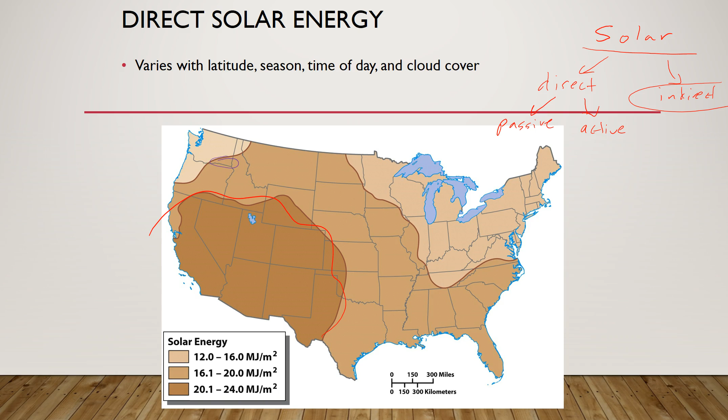Now looking at a map of the U.S., we can see that the potential to use solar energy varies based on location. Here, of course, in the desert Southwest, we've got our largest solar potential - no big surprise there. Parts of Washington, right down where Walla Walla and Tri-Cities are, we've actually got some decent, moderate solar potential in this area. In other areas you could still use solar energy, but probably not get as much bang for your buck.

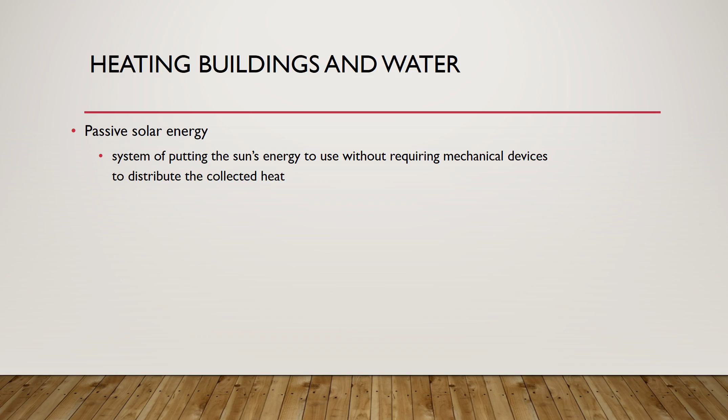When we talk about using solar energy for heating buildings and water, typically these are design features built in, and not necessarily high tech. It could be something as simple as the orientation of your house relative to the direction sunlight comes from, and so on. Passive solar energy refers to the system of putting the sun's energy to use without requiring mechanical devices to distribute the collected heat.

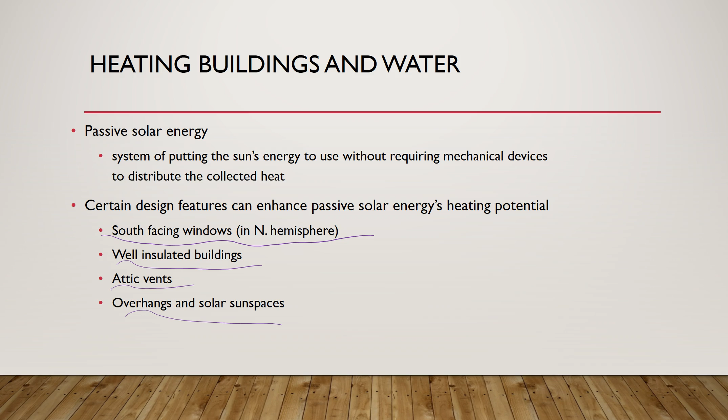So like I mentioned before, south-facing windows, using well-insulated buildings, attic vents, and overhangs and solar sun spaces. These are all design features, low tech, things that we could have been doing for probably centuries now, because they're such low technology.

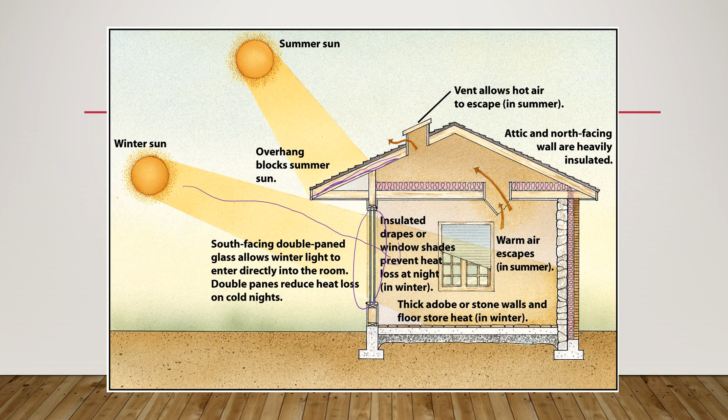Ideally, the south-facing windows would have overhangs that actually shade them during the summertime, so that we're not getting that direct sun during the time of year where we don't want that passive heat. But the overhangs can't be so large that they block that winter sun, in that we can actually use that lower horizon sunshine to directly heat your house, or at least supplement some of the heat you're getting. Now, in order for this system to work, though, we have to have very, very good insulation and so on. But this is an example of how a passive solar house would be built.

Typically, because we're not always going to get good direct sunlight, we might not be able to heat your water enough, so most solar hot water heater tanks have a backup heater. Maybe you only need to raise the temperature a few degrees to get it to the level you want, but it requires less energy from your own hot water heater if you can heat it somewhat with the sun using a solar hot water heater. In the summertime, when you do get that direct sun, your backup heater probably doesn't have to do any work at all. These aren't particularly expensive, but it is considered active solar energy because we have to use some sort of mechanical device.

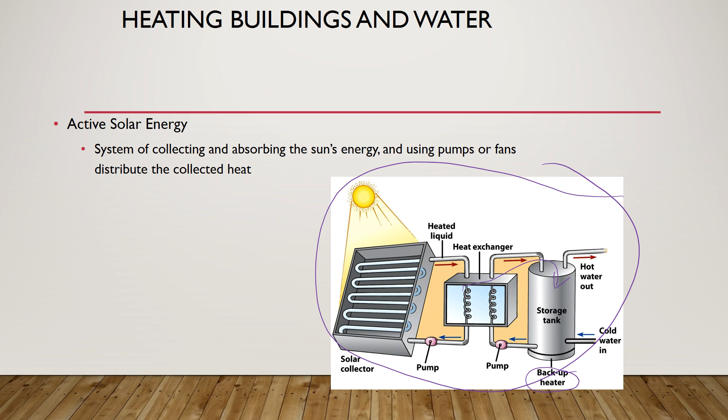As far as electricity generation goes, it's usually done one of two ways using solar energy. One of them is called solar thermal. This is a more efficient process than solar photovoltaic, although it's more expensive, and it has to be done on a kind of utility grade scale, unlike photovoltaics, which can be done on pretty much any scale.

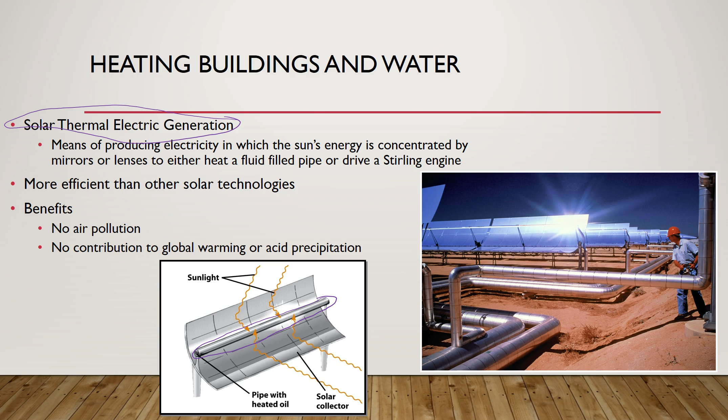With solar thermal electric generation, concave mirrors focus sunlight onto a pipe. That pipe is typically filled with oil as opposed to water, because oil can be heated to a much higher temperature than water before it starts to boil and create high pressure. They use the heat from that oil to power a steam turbine system, much like we talked about with coal and nuclear. It is more efficient than photovoltaics and more expensive, although there's no air pollution and no contribution to global warming or acid precipitation with solar thermal.

Now, what you guys are probably more familiar with are these actual, you typically hear them called solar panels, right? These are what they call solar PV, for photovoltaic. These are different because they're not using heat to produce steam and spin a turbine. They actually take photons from the sun and convert those photons directly into an electric current. So sunlight gets directly converted into electricity.

Now, the most common models out right now, although they are improving this, are really only about 15% efficient. That's because the materials they use only absorb about 15% of the sunlight and are able to convert that to electricity. Some of the benefits with these is they can be used on any scale. They can be used for something as small as a battery for a calculator, or all the way up on the utility scale to produce hundreds or thousands of megawatts of electricity.

So that's the biggest benefit, and the reason these are used probably more commonly than solar thermal is the small scale capabilities. You can just put them on people's rooftops. They don't have to have a large power plant, so the costs associated with them can be much, much smaller.

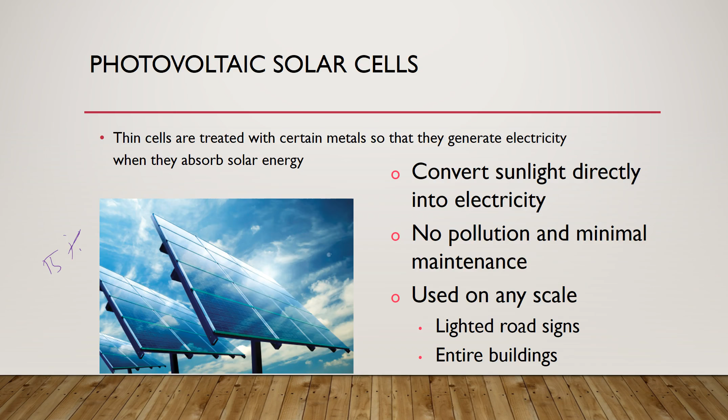So why don't we use solar energy more often? Well, first of all, we can only produce power during daytime unless we're able to store that energy with some sort of backup, like a battery, for example, which is proving to be a big challenge for us.

Requires a lot of space. In the case of photovoltaics and solar thermal, a large footprint is needed, although it is worth stating that we can throw photovoltaics on top of space that's already being used. We can put them on rooftops, on the medians of highways, over parking garages, and so on, so it's not as big of an issue with photovoltaic. But solar thermal, you're going to have to put that out somewhere far away, because you need one large, wide open space for that to make that work.

Generating electricity at the utility scale is more challenging for photovoltaics, and there are lots of variables involved with how much electricity you can get out of them. Cloud cover, the angle of sunlight, the time of day, all these things make it a bit more of a challenge.

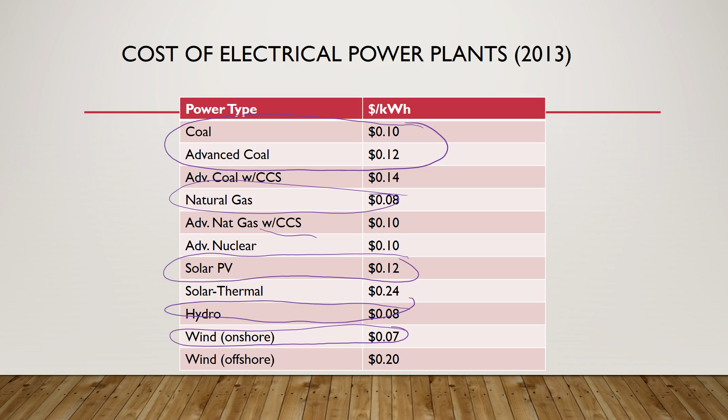But cost really isn't an issue with photovoltaics and wind. It's really how much energy we can get, and can we get it when we want it. That's more of an issue.

All right, so indirect solar energy. We're talking about processes that use the solar energy originally. Things like wind, which are driven by atmospheric currents, and those atmospheric currents are driven by changes in solar energy. The hydrologic cycle, which we use for hydropower.

Evaporation, that whole cycle relies on solar energy. Biomass, so plants, as you know, use solar energy for photosynthesis in order to grow. So those are what we call indirect solar energies, but still, ultimately, that energy source is the sun.

All right, so biomass, for example, plant material used as fuel. This is a pretty common thing. Lots of you guys probably have wood stoves in your house, you are using biomass energy. So wood, crop waste, sawdust, whatever, pellet stoves, for example, are all using biomass as a form of energy. Typically, we would use that as a heat source. That's the most common use.

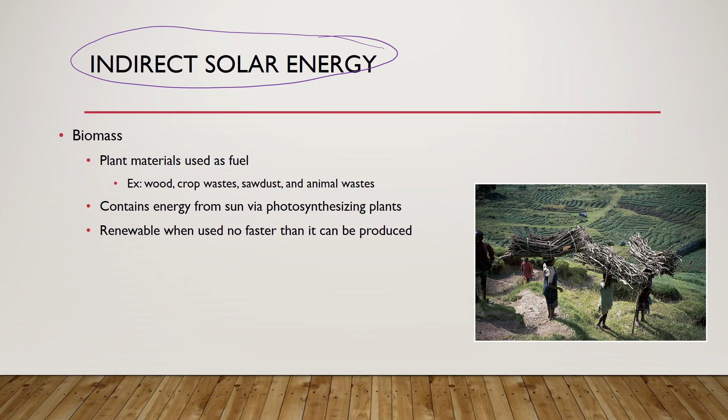We already talked about the photosynthesis thing. Now, is biomass energy renewable? There's kind of a spectrum there, but theoretically, yes. If you're regrowing plants at the same rate in which you use them, that is a renewable resource, as long as the rates are equal.

And we can also use biomass now to convert to a liquid fuel that we can use in transportation. So most of you know now that gasoline is at least part ethanol, usually around 10% or so. Biodiesel, which is basically using vegetable oil, can be used as a diesel substitute. These would be considered renewable fuels, again, because we can grow the plants to produce them.

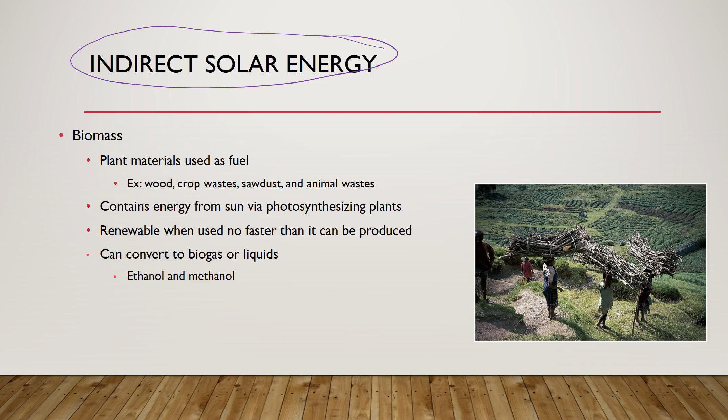So what are some advantages of biomass? Definitely reduces dependence on fossil fuels because we can directly replace our fossil fuels with biomass fuels. It often uses waste materials. So there's new technology into using, let's say we grow corn for food, using the cellulose from the corn stalks to then produce ethanol. So we can use crop wastes more efficiently.

And of course, we can have no net increase in atmospheric CO2, because when we burn the fuel from the plants, theoretically, we are regrowing plants, which take that same amount of carbon back out of the air.

Now, disadvantages. If we start using agriculture for energy, we're going to have to convert more land over to agriculture, because we're still going to have to eat. And so if our food is now becoming energy and fuel, we're going to have to convert more land over for agriculture so that some of it can be used for fuel and energy, and we can still grow food for ourselves.

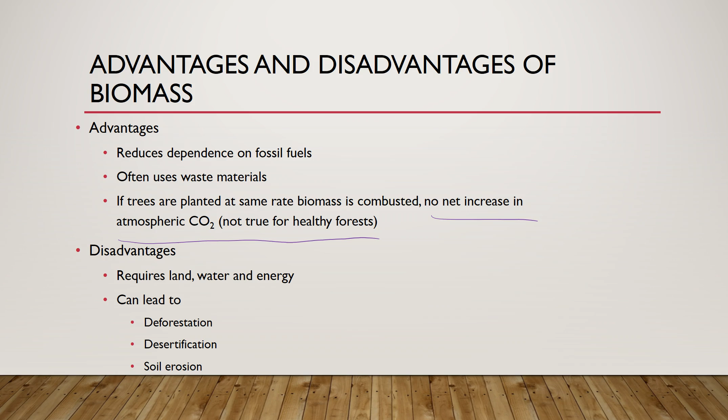And doing so would then lead to things like deforestation, desertification and soil erosion, which are things we'll talk about in a later chapter, but also some disadvantages there.

Wind energy. You guys should know all about this because we see it all around us. In areas where wind is common or pretty much a daily affair, wind energy is a very, very good option. Lots of people don't necessarily like the look of the turbines.

And it's as simple as the wind hits the turbine blades. So those big blades you see on the wind turbines are the turbine part of that, and as that spins a shaft that's just connected to a generator, and there's our electricity. So there's no heat or steam turbine with our wind energy.

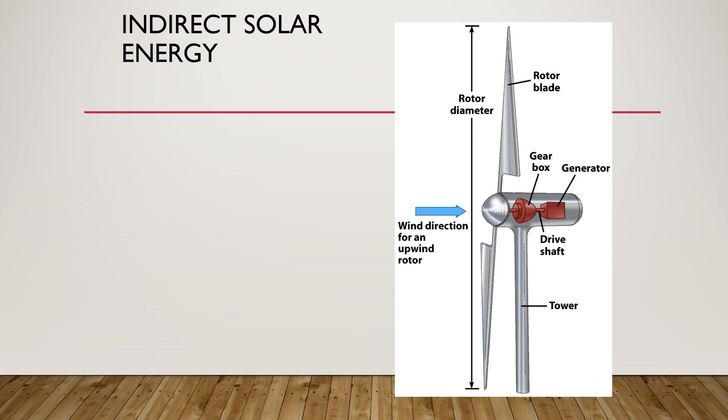This is by far the world's fastest growing energy source because it's relatively cheap. The technology is out there. We found ways to make it work in most areas. And so away that industry has gone.

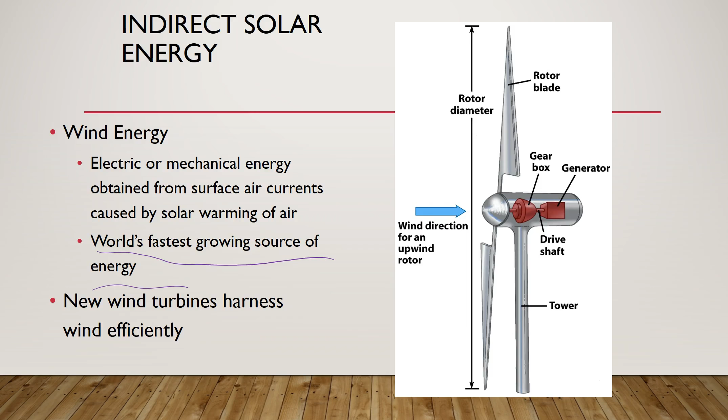Our newest turbines actually harness wind efficiently, and the great big ones can produce up to 3 megawatts, which is impressive. All right, where do we see wind?

Well, it's most profitable in rural areas. What's cool about wind turbines, and this is happening right here in our valley, is that they can put the wind turbines on agricultural land. So our farmers and ranchers can continue to farm and ranch, and they get a nice little extra paycheck because they lease the space to the power companies. Pacific Power, for example, installs and keeps the wind turbines operating effectively, and will often lease space from farmers. So farmers can still farm, still ranch, but they can essentially get a little rent check from the power companies who put their turbines on their farm. It's a nice little win-win scenario.

Now, as far as environmental problems associated with wind turbines, there are few. We need a lot of space for wind in terms of spacing the turbines out, but again, the actual footprint of the wind turbines is small. Probably the biggest critics of wind turbines, aside from fossil fuel enthusiasts, are bird lovers. They have been known to show an increase in bird and bat deaths, which is concerning, although they've figured out if they place the wind turbines properly, that's not such an issue.

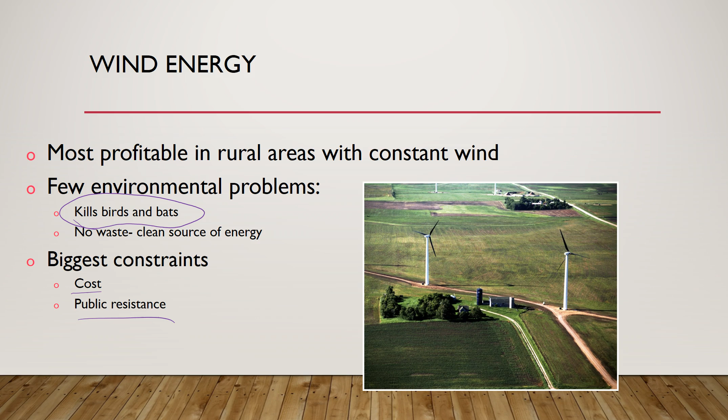And not so true now, but some of the biggest constraints are cost and public resistance. Just a few short years ago, there was lots of anti-wind sentiment, but wind sort of won that, and you don't hear quite as much hubbub about it nowadays.

All right, last but not least, as far as our indirect solar energy, is hydropower. You guys should be familiar with this because this produces the majority of the power in Washington State. Traditionally, that would be done with a dam, with a big reservoir. So now we have a large amount of gravitational potential energy, and that big reservoir of water puts a lot of pressure.

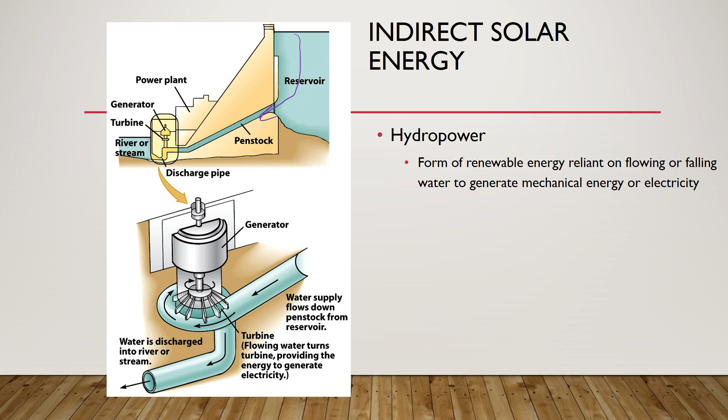And so to produce electricity, again, this is not a steam turbine process. This is a process of just using moving water to hit a paddle that spins, and that paddle, that turbine, is connected to a generator, and there's our electricity. The water's discharged out, unpolluted, no problem whatsoever.

This process right here is by far our most efficient energy source, over 90% efficient. This is an old technology that runs at about 90% efficiency. So we can produce a lot of power at a moment's notice because we don't have to heat up water to do this. Some of these dams we have nearby are essentially acting like great big batteries. Let's say we have a large demand for power and the turbines aren't spinning very well—we can fire up one of these dam generators in seconds. It's pretty cool.

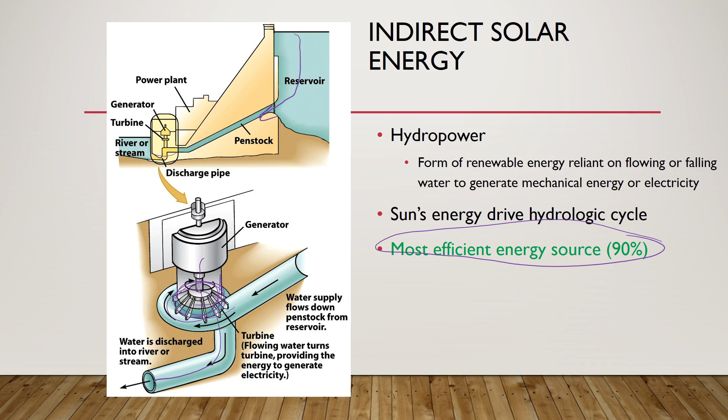Now, unlike wind, hydropower does sort of have some concerning environmental impacts. We generate about 19% of the world's electricity with hydropower, and of course that's going to be larger in areas that have lots of streams and less in areas like Saudi Arabia, where there are essentially zero streams.

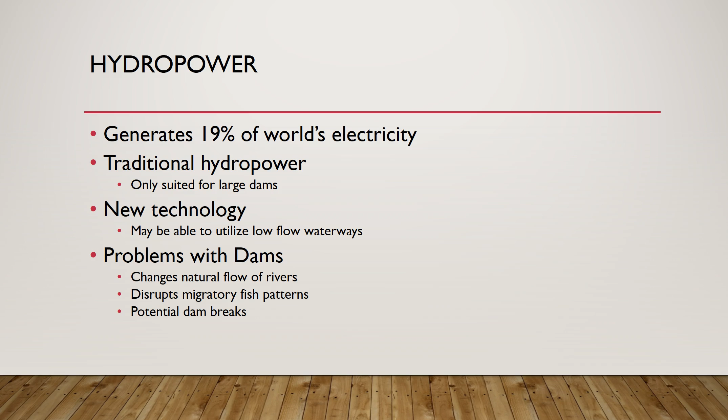Traditional hydropower is really only suited for these large dams, although new technologies are finding ways to use low flow waterways and much less intrusive methods. But dams do change the natural flow of rivers—it disrupts migratory fish patterns, around here we'd be talking about salmon mostly. And of course there's potential dam breaks, although in the U.S. we haven't had any major issues with that. We'll talk more about problems with dams in a later chapter when we're talking about water resources, but it is worth knowing a few of those at this point.

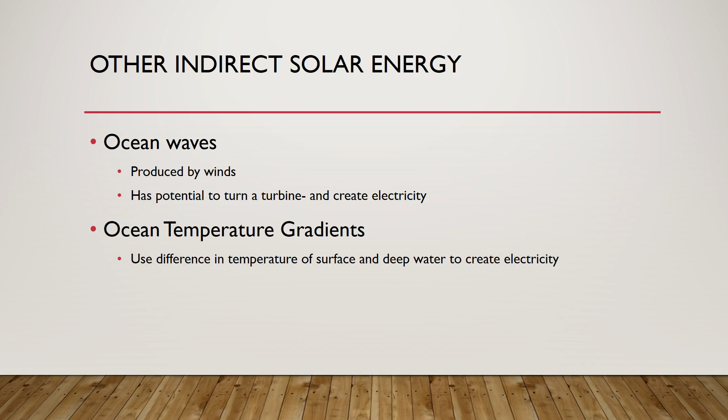Other potential forms of indirect solar energy include ocean waves, which can only be used on relatively small scales in coastal areas, and ocean temperature gradients, which is kind of advanced physics to understand. But these are just other potentials—I probably won't be testing you on those.

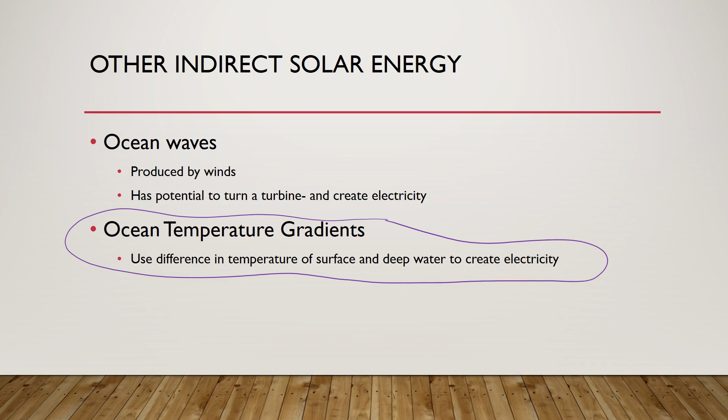Sorry, this got a little long-winded, but we need to cover some ground with that upcoming test. All right, but that covers the first few sections of Chapter 13.